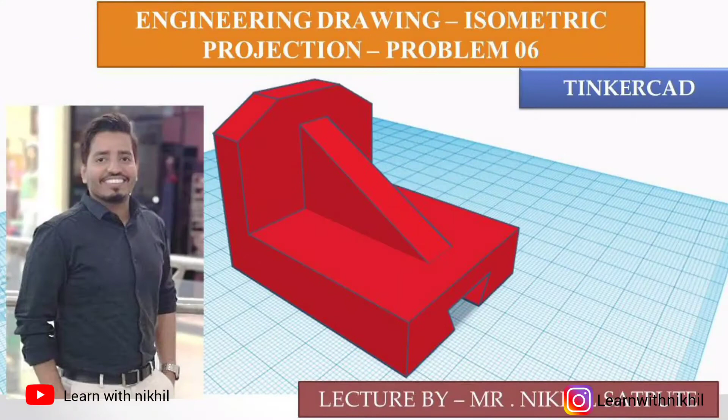Here we will draw an isometric sum using Tinkercad software. This is the direction arrow X. You have been given the front view and the side view, and we have to draw its isometric view. I have drawn this manually also.

First we'll create a box of the dimensions 63 as width, height as 47, and depth as 50.

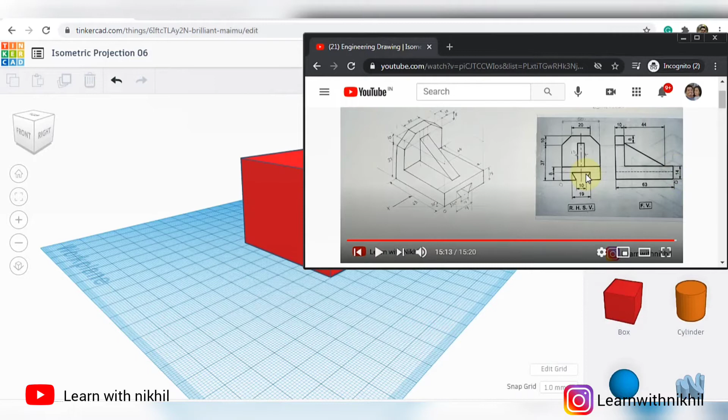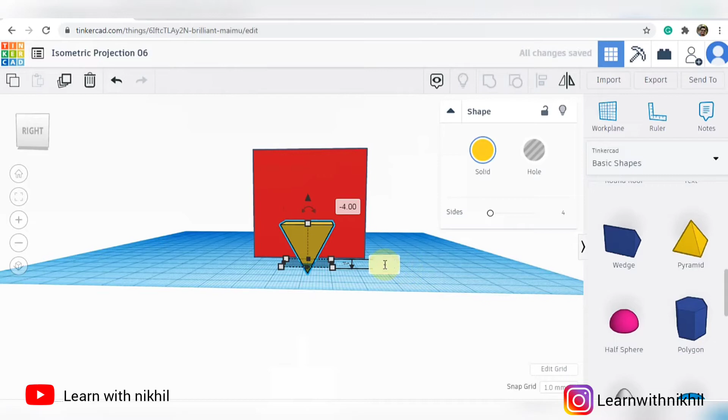Later on you can see we have a cut part, a triangular slit at the bottom. Its dimensions are 19 and 10, and height is 8 millimeters. For that cut part we'll take a pyramid and rotate it at 180 degrees. The total height of this pyramid is 20, so we'll move it downward by 12. The remaining upper part is 8 millimeters, which is what we require.

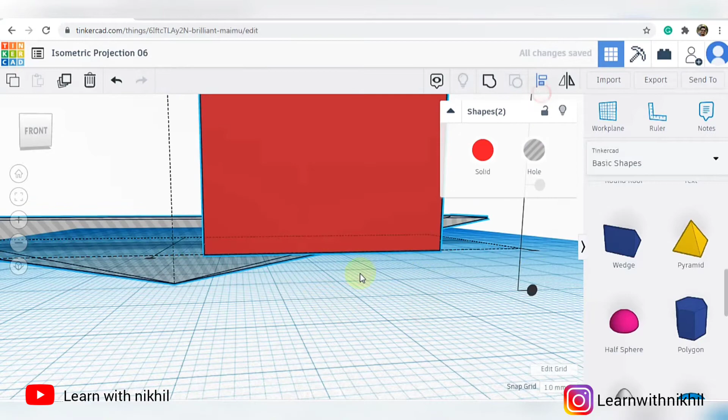Now we'll arrange the base as per the dimensions and cut this part. Before cutting, you have to convert it into the shape of a hole. Just increase it so we can cut the whole slice, and cut it. So this part has been done.

Now we have to cut this block into an L shape. We'll cut this totally, so the width remaining to cut will be 63 minus the thickness.

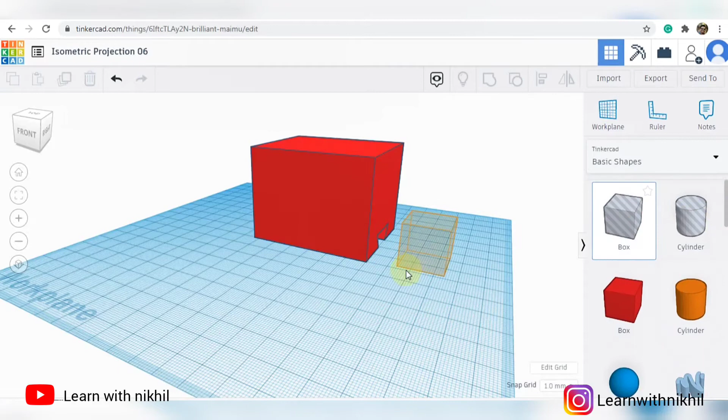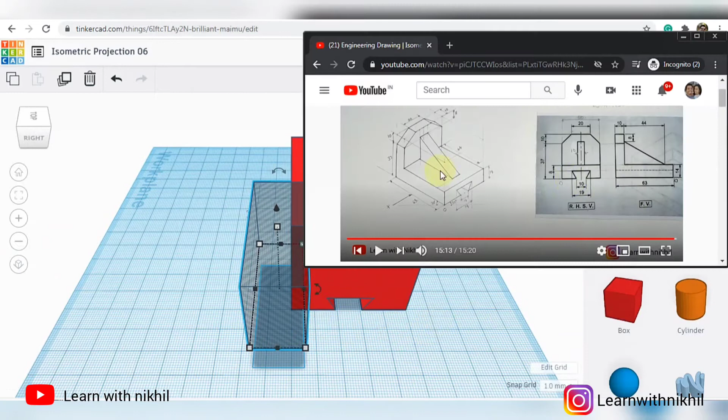That will be 53. Height we again have to calculate: 47 minus the upper height, that is 14, will be 33. So height 33 and thickness width 53. I'll raise it up at a height of 14 as the cut part is above 14, and this width is 50.

Aligning this at the front side, and then grouping this will give me the cut part. Now this part has been cut.

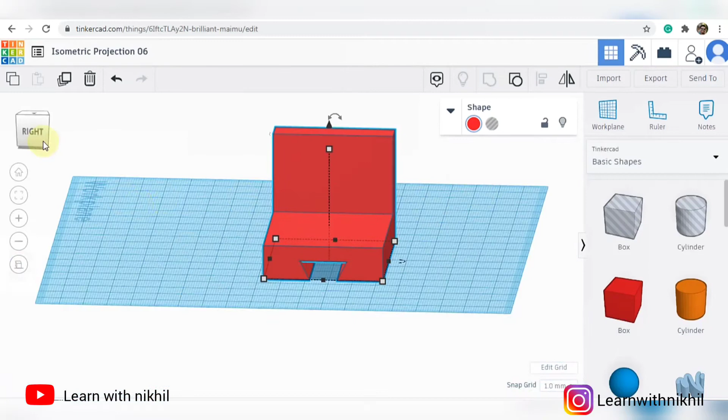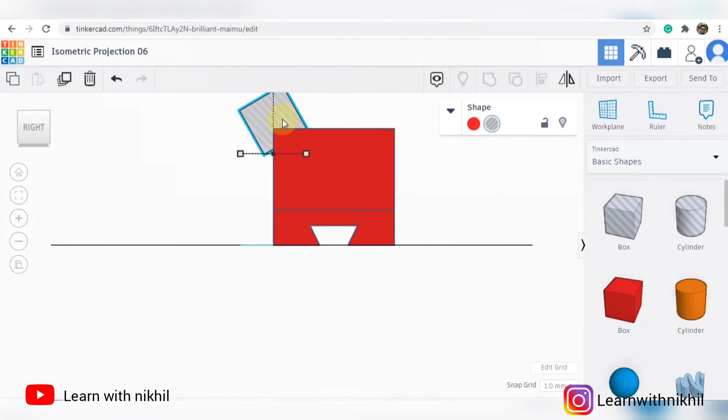Now we have to slice the tips of this box. For that I am taking a box with the shape of a hole, rotate it at an angle, and raise it up at a height of 37. Now arranging it, group it, and this part will be sliced.

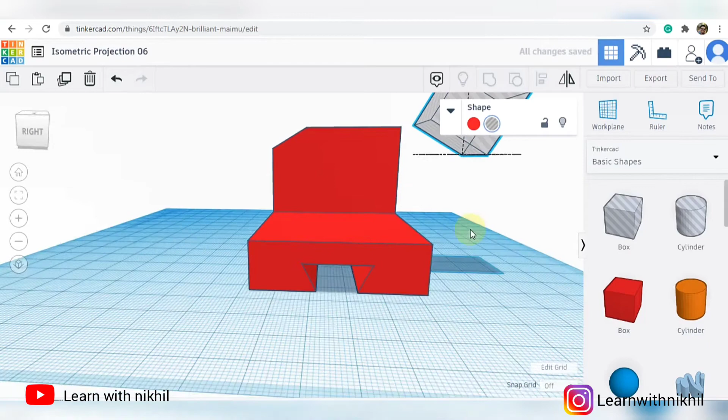Now do the same on the other end as well. So both parts are cut.

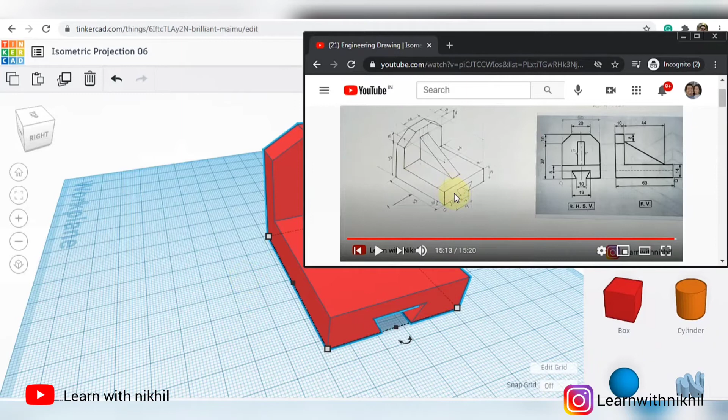Now we have to add this part, the center part, the L shape. For that I'll take a wedge, rotate it, then move it upwards at a height of 14. Move it behind, its thickness is 10. Align it at the center as you can see.

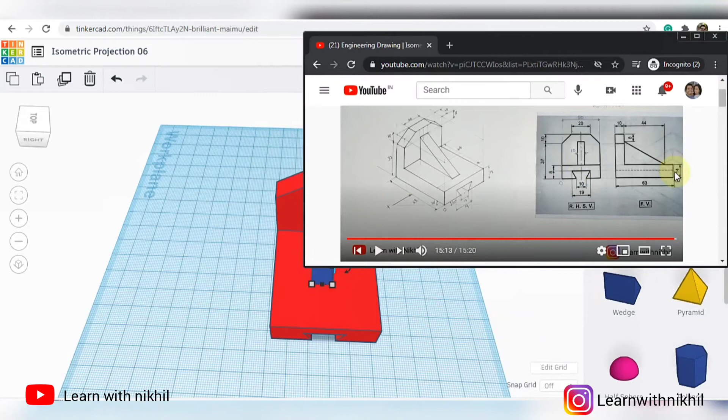The height of this block we can calculate: the total height is 47, minus this height of 14, and minus 8 from the top, so 25. So the height of this block will be 25, and this will be 44.

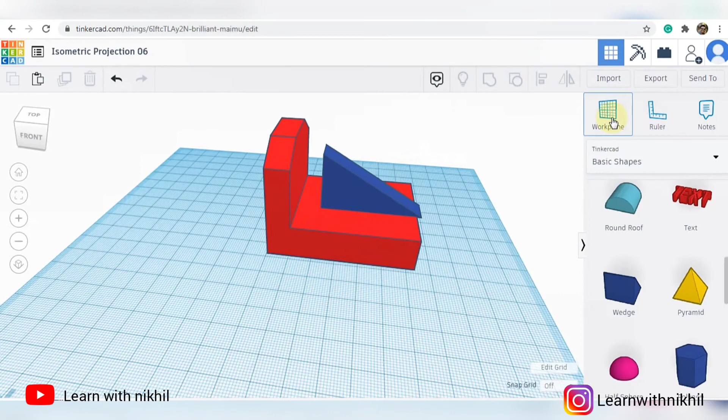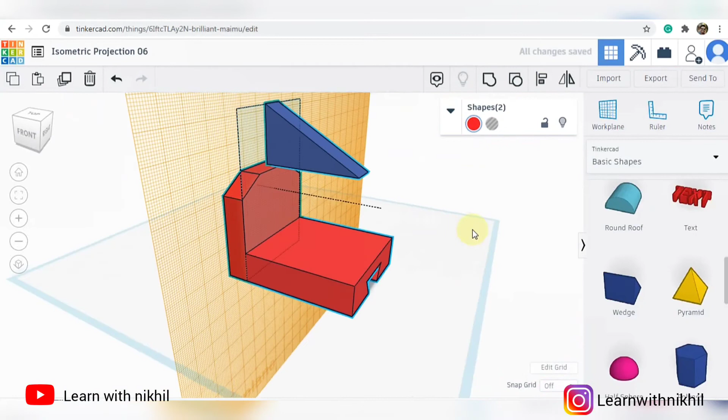Now we have to arrange it at the back side. For this I have arranged a work plane. You can use a work plane, or you can just not use that and directly align, but the work plane makes it easier to align as it totally arranges it. I've aligned it at the back, keeping the work plane here. I'll move it downward to 0, and it has been perfectly aligned.

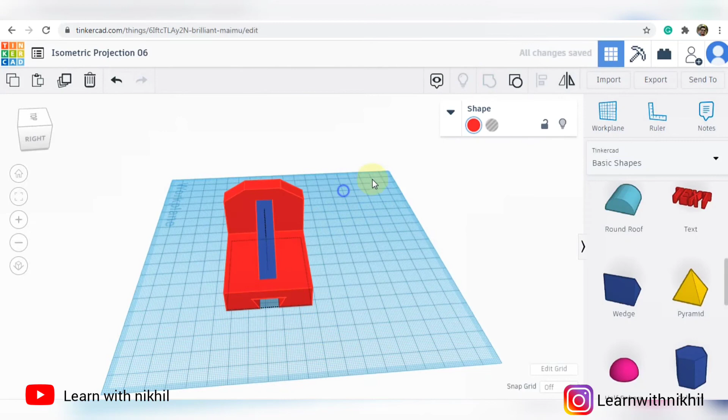Now just select all and group. Grouping will change the color, which will let you know that it's one block image. So our whole three-dimensional image is done.

I'll convert this into orthographic view and we'll compare it with the front view and its side view. So this is the image we have done.

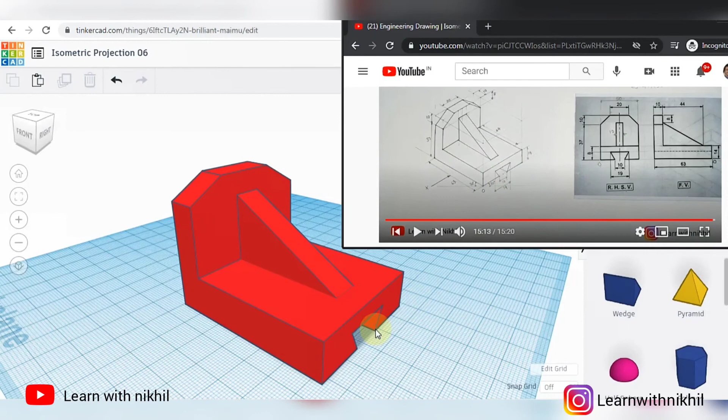The slit part you can see, this line you have to draw when you are drawing it manually.

So this is the RHSV view, right hand side view. As you can clearly see, we have drawn it.

This is the front view. The slant line looks like a straight line from this front view.

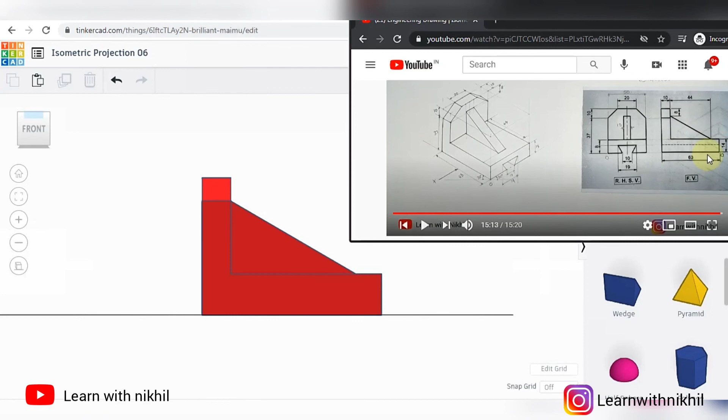Converting back into its isometric view, you can see how the lines you have to draw.